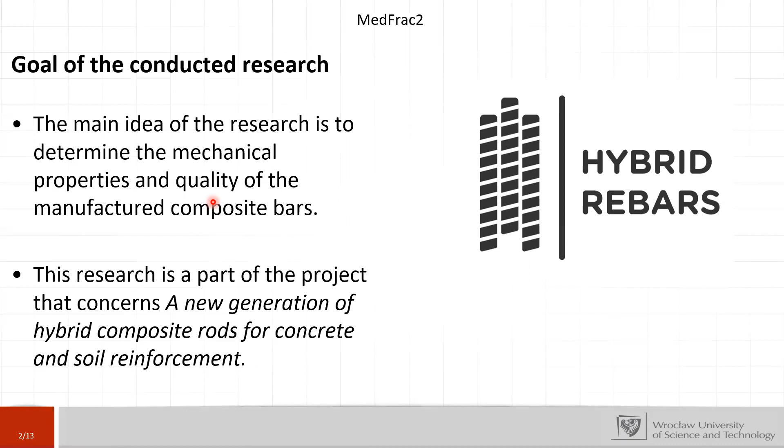So as an introduction, I would like to point out that we manufacture three kinds of bars, such as glass fiber reinforced polymer, basalt fiber reinforced polymer, and the hybrid one. So the core is made of basalt fiber with the glass fiber, and it is unidirectional, of course, material with the epoxy resin. So we use the pultrusion system, as you can see in figure 1. That's our main manufacturing system.

So with these bars, we perform 3 static mechanical tests, such as tensile test to determine the Young modulus and tensile strength. To be honest, this test is quite challenging because of the anchoring system as well as the sample length. Then flexural test. So we determine the tangent modulus of elasticity, so in bending, right? Then short beam, we examine the apparent shear strength. And I also put here the transverse shear strength. So that's also the alternative for this short beam test.

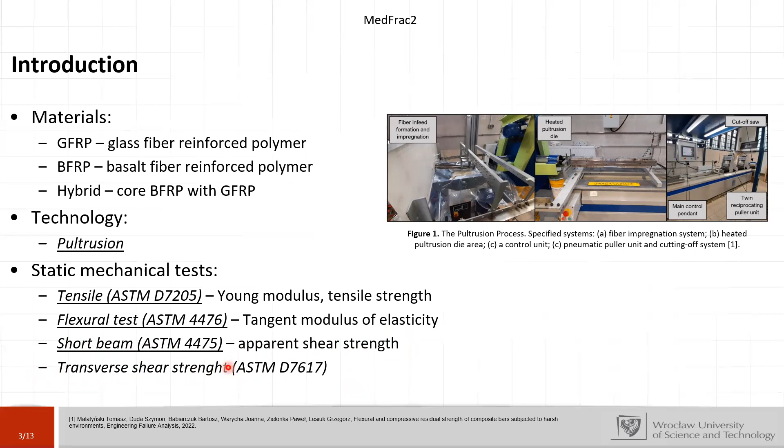So moving on, let me start with the tensile test. We used 9 samples, 8 of them with 6 millimeters of diameter, and 1 was with 10 millimeters. And as for the anchoring system, we used epoxy resin with quartz sand, and the steel tube was filled with this mixture, and also there was a bar that prevents the slipping of the bar, and we could grip the steel tube in the testing machine.

Because of some limitations caused by our universal testing machine, we needed to increase the adhesive strength inside the anchoring system, because we could not provide the proper length of the anchoring system that is mentioned in the standard. So we used a primer with quartz with different grain diameters, like you see here. It's up to 0.3 micrometers. Then just the primer, sandblasting, and finally the quartz sand, but with greater diameter up to 0.6 micrometers.

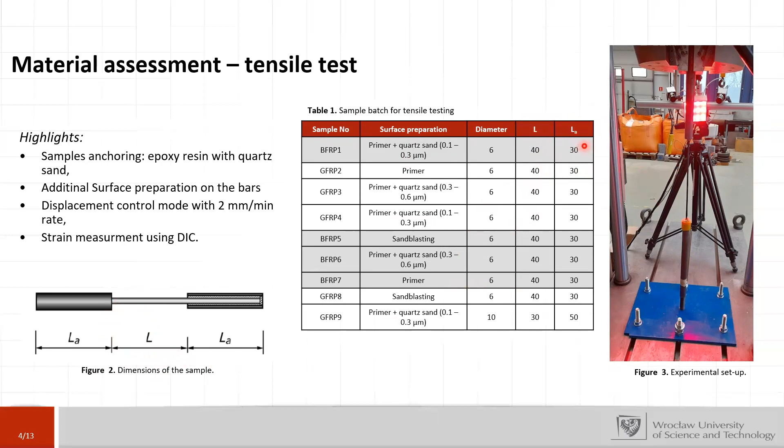So we used the displacement control mode with 2 millimeters per minute. And in the figure 3, you can see the experimental setup. We use DIC, so digital image correlation, to measure the strain during the test. And here in the table, you can see the length of this part, and LA is the length of the anchoring system of the one anchor.

So then flexural test. This test is quite interesting because we need to prepare special samples that are cut along the bar axis, or we can just manufacture such profile or shape using the pultrusion. And the reason is that we need to decrease the compression area in the bar. As you can see, there is a strain distribution for the compression side, and this one is for the tensile one.

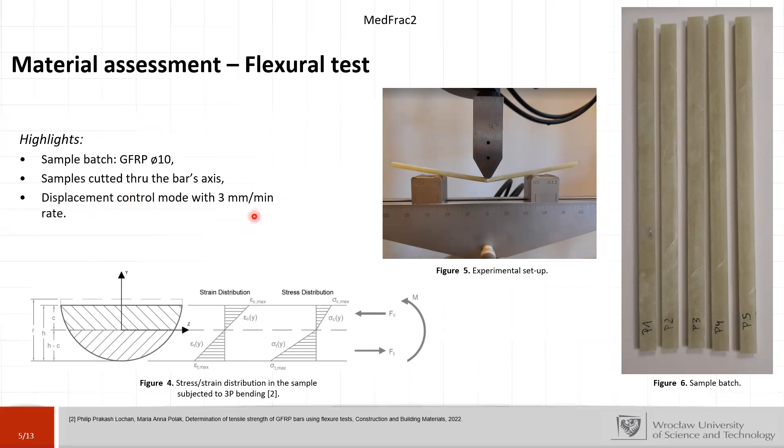And we use the glass fiber reinforced polymer with the 10 millimeters of diameter. We cut it through the bar's axis, and we use the displacement control mode with 3 millimeters per minute.

Okay, then short beam test. So here we use more samples. So GFRP with 10 and 6 millimeters of diameter, then basalt fiber reinforced polymer, and the hybrid one. And the hybrid one is with 8 millimeters of diameter. So the displacement control mode with 1.3 millimeters per minute, and we calculate the apparent shear strength as it is presented here. That's the formula for this, where P is the breaking load and D is the diameter. Here we can see the test stand.

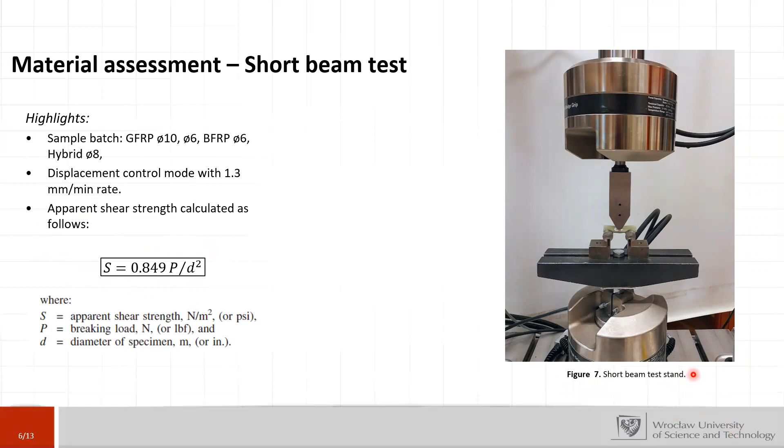And now let me turn to the results. First of all, the modulus of elasticity. So here in figure 8 we can see the results for the basalt fiber reinforced polymer, and here in figure 9 for the glass fiber reinforced polymer.

As you can see in the table, we put here the value of the Young modulus, and also from the 9 samples, 3 of them did not withstand the applied load. It means that the adhesive strength was not enough and we had a pull-out. So we could not determine the Young modulus, and mainly the primer with quartz sand up to 0.3 millimeters was not a sufficient way to prepare the surface for increasing adhesive strength.

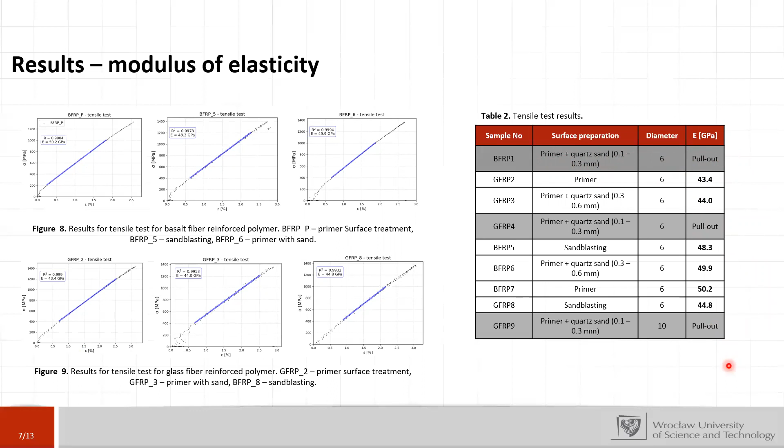Then the results for the modulus of elasticity in bending. In figure 10 you see the force-deflection relation for the flexural test. And here it's possible to see the equation for the modulus of elasticity, which we used according to the ASTM standard. We see that the average result for the flexural modulus is approximately 80 gigapascals.

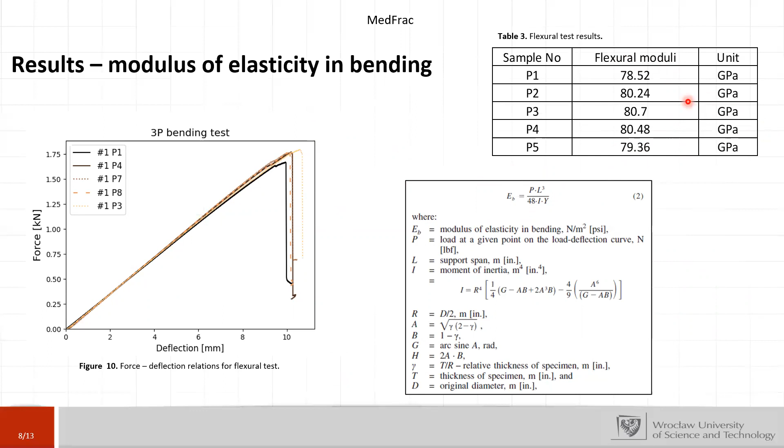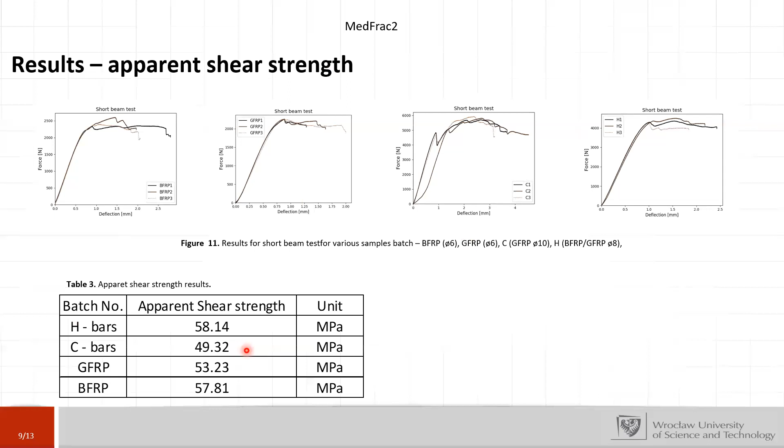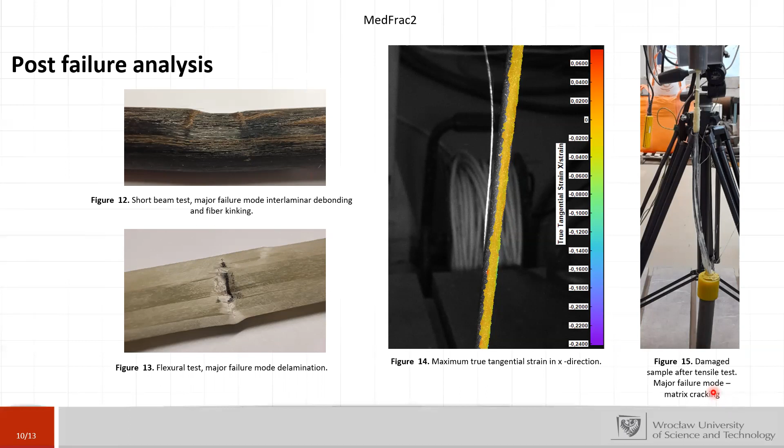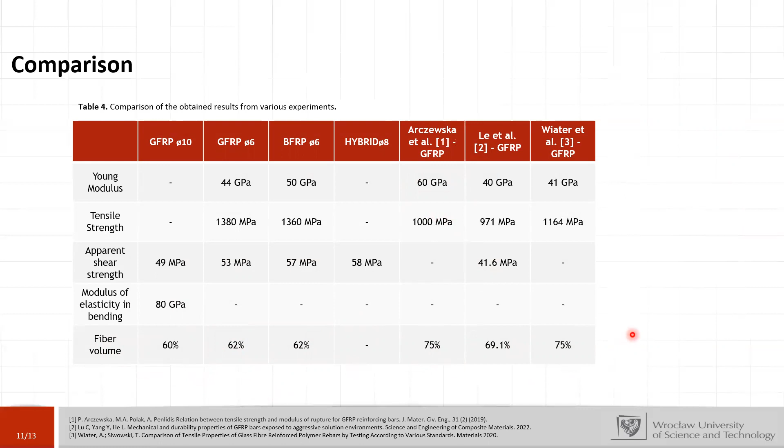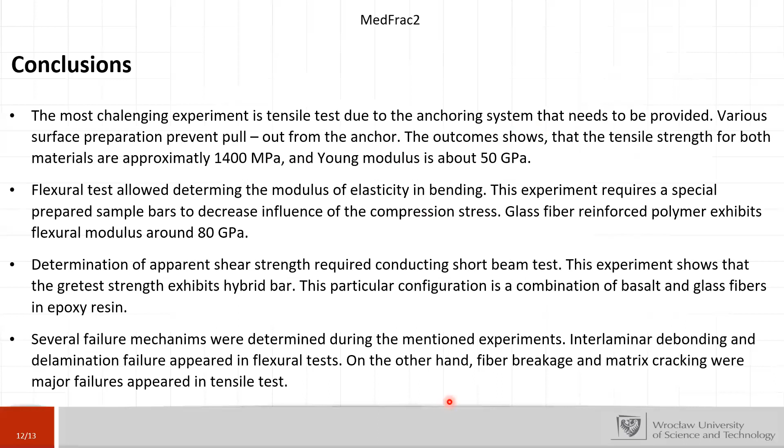Finally, several failure mechanisms were determined during the mentioned experiments. Interlaminar debonding and delamination failure appeared in the flexural test. On the other hand, fiber breakage and matrix cracking were the major failures in the tensile test. So thank you for your attention.